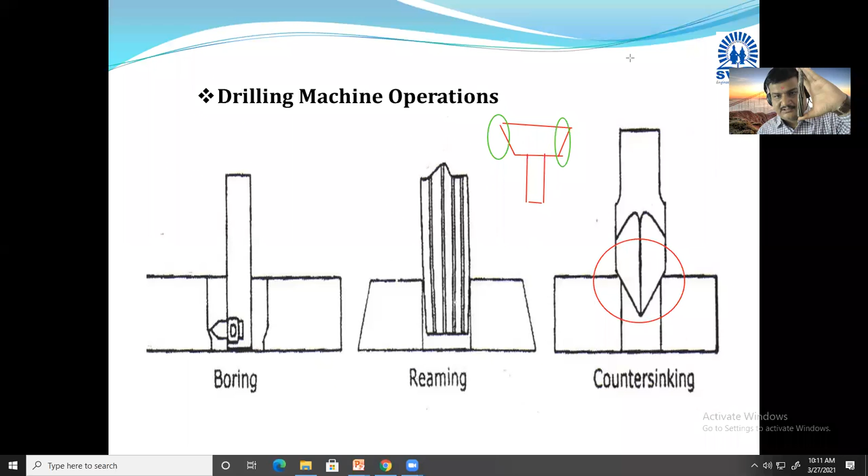This is the sharp, long edges of your reaming tool, which is called a reamer. The reaming tool is also called reamer. I will stop screen sharing for a few seconds so this tool is easily visible to you. This is the tool utilized for the reaming operation. You can see the edges here have more length and they are a little bit sharp. These cutting edges are sharp.

When you insert this reamer inside your hole, it removes the additional material present in the hole. Whatever additional material you see in your generated hole, you can remove it easily with the reaming operation. And when you remove that additional material, your generated hole will be very smoothly finished after reaming. That's why this reaming operation is important.

So we have studied 6 operations. Number 1 is drilling, number 2 is boring, number 3 is counter boring, number 4 is counter sinking, number 5 is reaming, and number 6 is tapping. These 6 operations we can do.

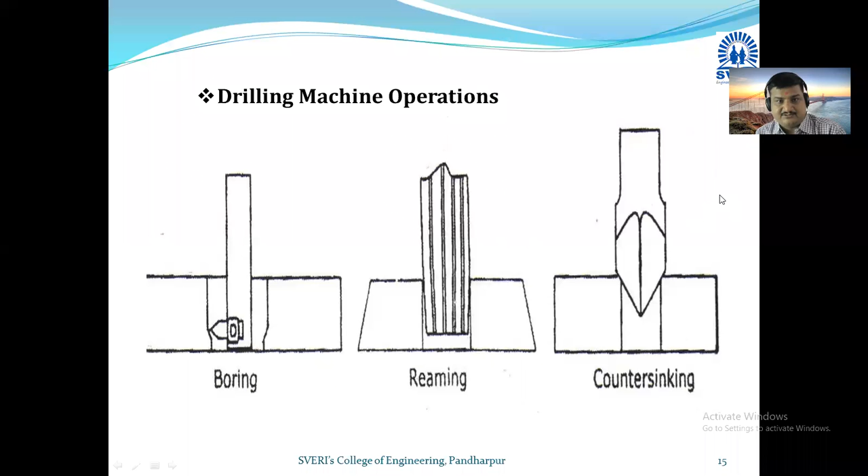Now for your better understanding, I have shown you the counter sunk hole. This is the counter sunk hole. You can see here the conical surface is at its top side, and the cylindrical or rectangular surface in this figure is at its bottom side.

For what purpose is it made? It is made to fix your screw face to face. This screw arrangement needs to be fixed face to face, so we utilize this. Otherwise, what happens - if your counter sink is not there, this part will come above the material surface, as shown in the second figure. And if this comes above the material, it can create harm, and when you handle that particular equipment, such an extended part of the screw can create some injury. So to avoid such things we do this counter sinking.

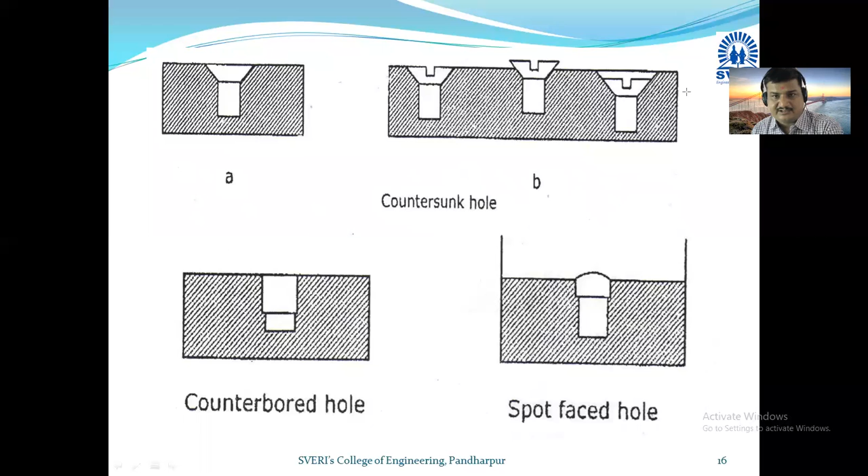Yesterday we saw the structure of the drilling machine, and today we studied the different kinds of operations using our drilling machine. So I request you, without wasting much time, copy down these diagrams in your notebook - very simple, small diagrams, not big half-page diagrams, in 5 to 6 lines. In one line you will draw 3 diagrams, so in half a page the 6 figures of drilling machine operations should be covered. Copy it down in your notebook immediately.

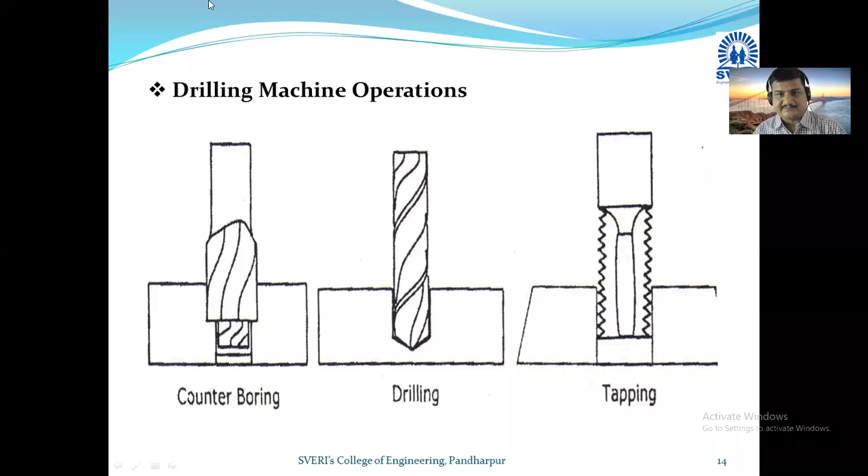Okay, so for the time being, 6 operations we can perform. The first operation is drilling, and you can see on the workpiece you can generate the hole with the help of the drilling operation. It is clearly mentioned that when you want to generate a hole for the first time, you need to go for the drilling operation first, and then you can carry out the remaining operations on that hole. So the basic operation with the help of your drilling machine is drilling.

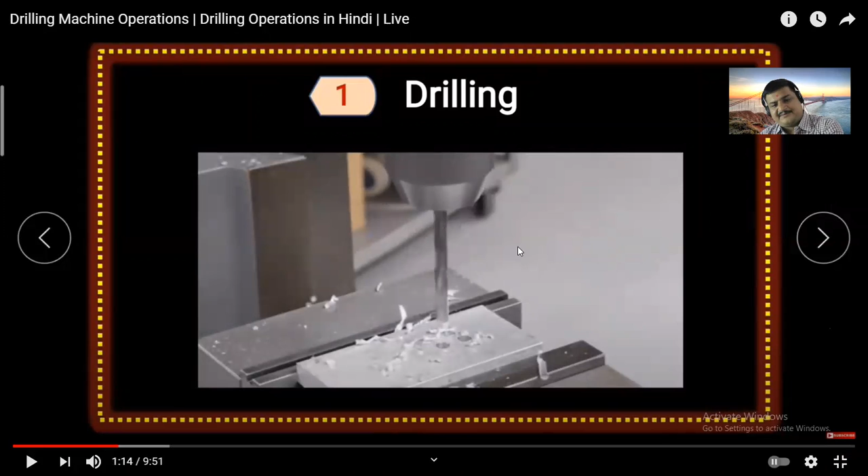You can see the drilling operation, and you can see that the workpiece is fixed here and the tool is rotating, and vice versa. If you take the example of a lathe machine, the workpiece is rotating and the tool is stationary. So that is the basic difference between a drilling machine and your lathe machine.

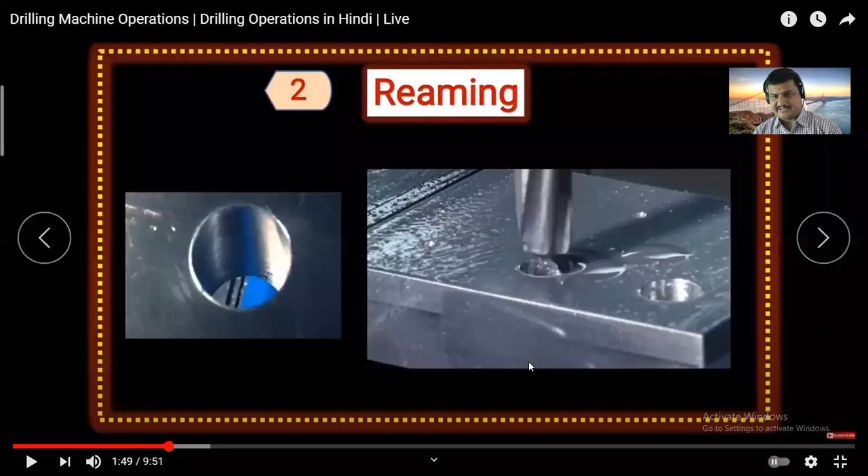Second operation is reaming. You can see the hole is generated. In the picture, on the right hand side one hole is there, then another hole on which that reamer is provided. I have shown you the reaming tool, and here this reaming operation is performed to create a finished hole with a smooth surface. On the left hand side you can see the smooth surfaced hole - look at the surface inside the hole, you'll notice a slight glazing, a shine, because we use the reamer and it makes it very smoothly finished.

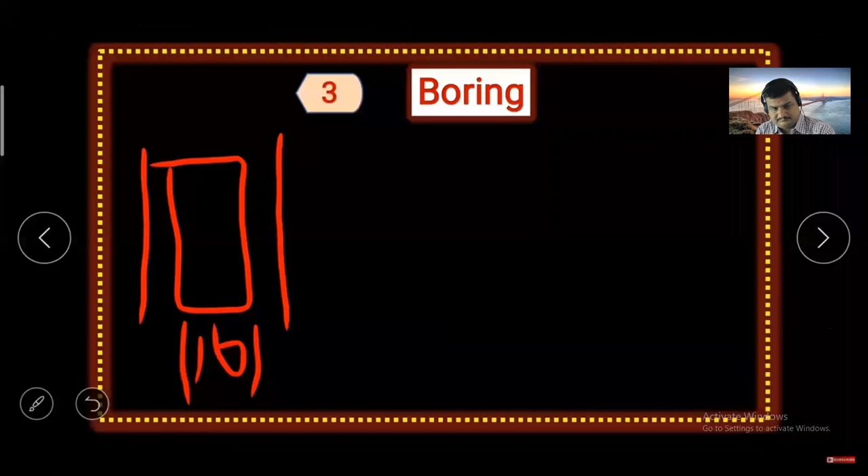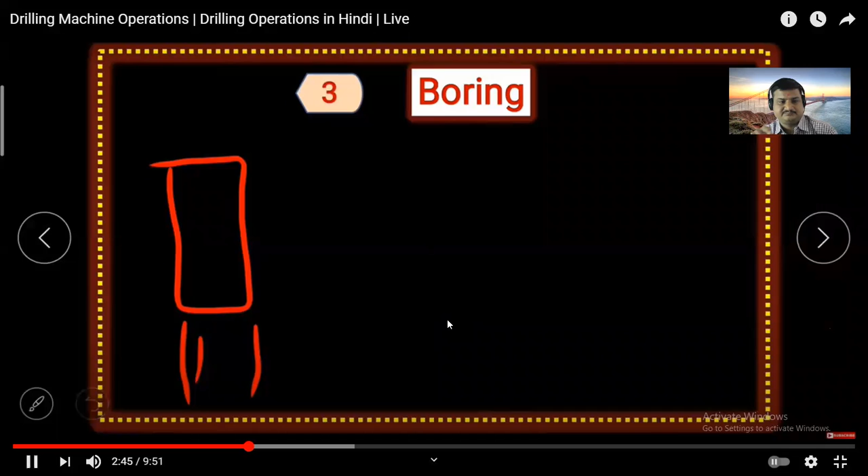So if you have, suppose, one hole of 10 mm diameter, and if you want to convert it into a bigger hole of 20 mm diameter, at that time this boring tool is utilized and the diameter of your hole is enlarged. For that purpose, the boring operation is carried out. See the small hole, and that small hole is being enlarged.

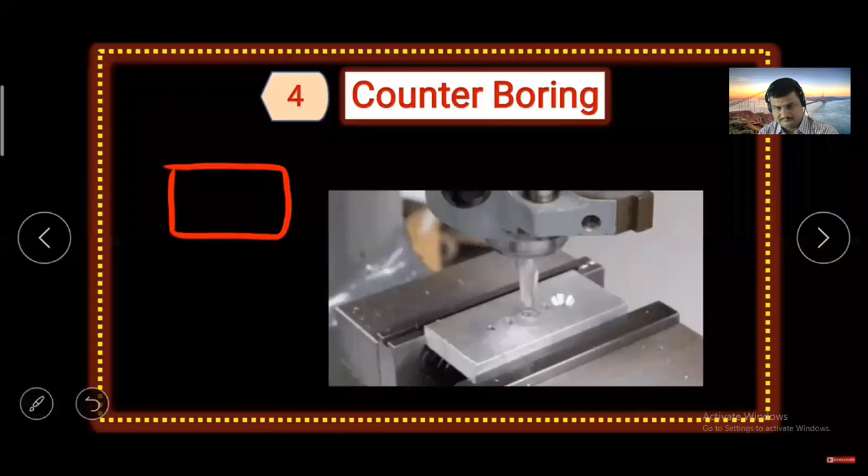So if you have generated a hole and want a top side hole with a large diameter, and a bottom side hole with a smaller diameter, then you can carry out this counter boring in two steps. First, you make a hole of the smaller diameter at the bottom part, and then using the counter boring tool you generate the larger diameter hole on top.

Now you can see in this video, as per this diagram, at the center side there is already a hole, and on that hole we want to perform the counter boring operation, and it has been performed. On its top side we manufacture it in such a way that, with the help of counter boring operation, it has a large size diameter compared to its bottom size.

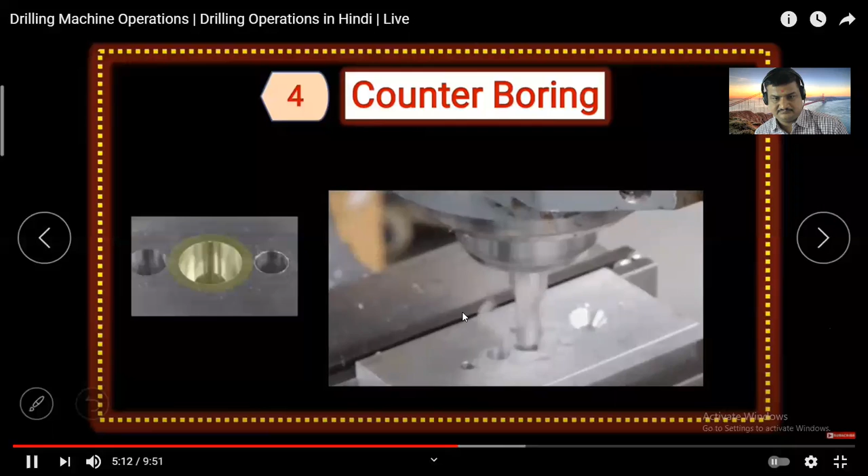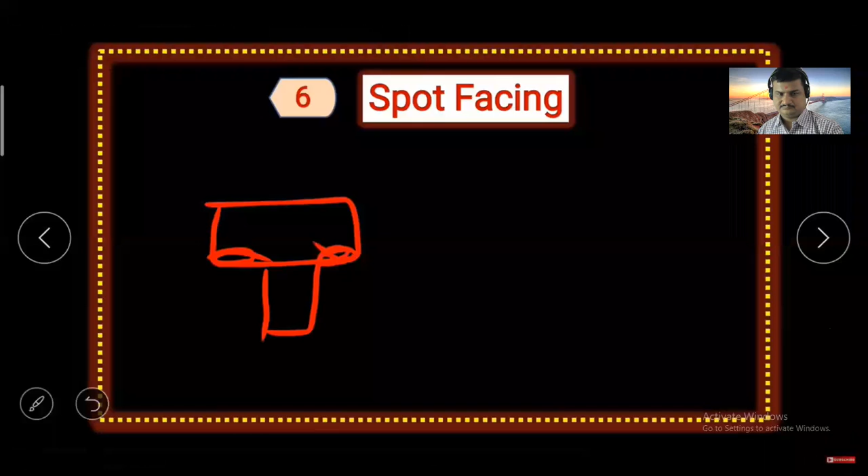So spot facing operation is utilized to once again provide a smooth surface inside the countersunk hole, because at the curved part where there is a proper corner, sometimes material remains there, or the metal burr stays in one place. To remove that and to finish that part smoothly too, this spot facing operation is utilized.

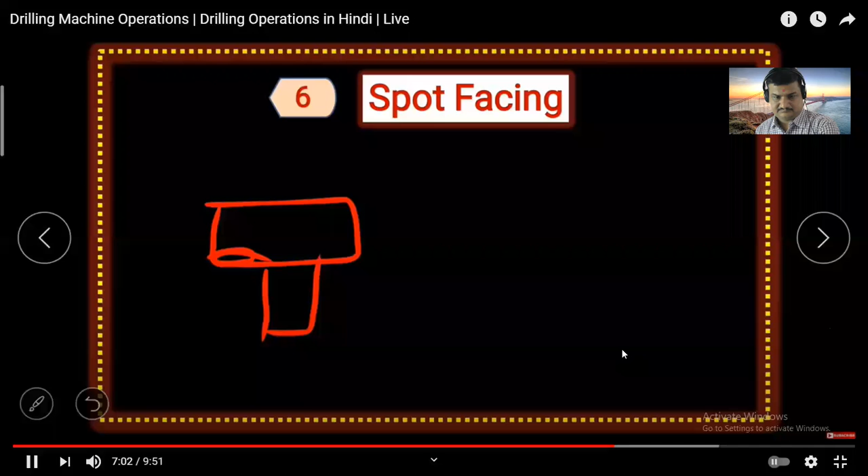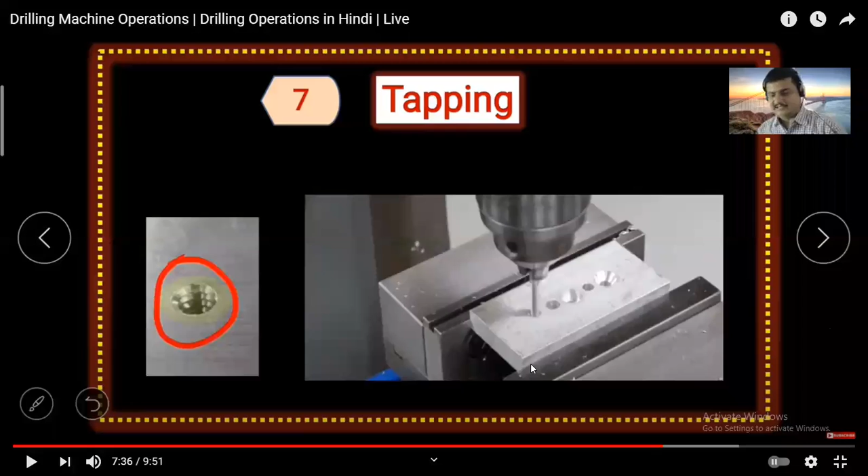So this is tapping. See the figure on the left hand side on your screen - inside the hole of that left hand side figure you can notice threading, and that internal threading is nothing but the tapping operation.

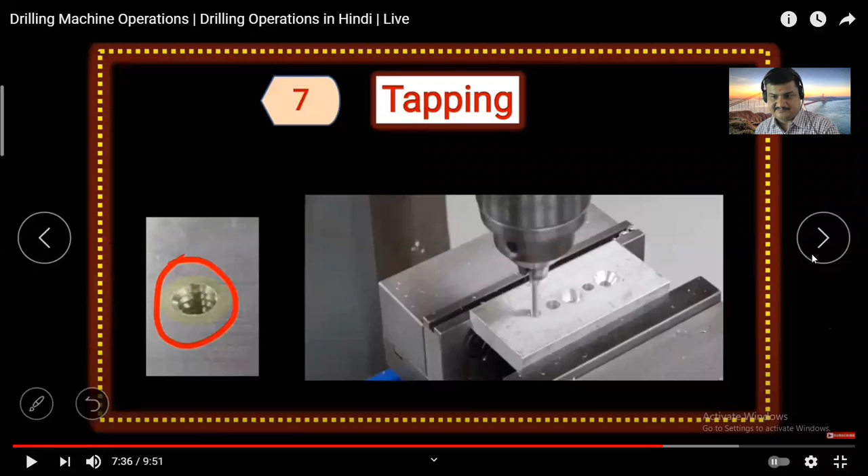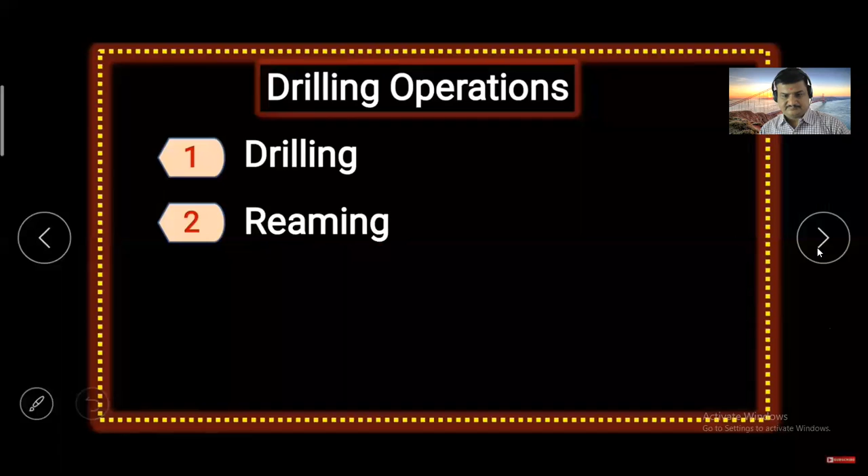So in this way we have seen the various operations with the help of the drilling machine - that is nothing but drilling, reaming, boring, counter boring, counter sinking, then tapping, spot facing. Such kinds of various operations we can perform with the help of our drilling machine. So this is all about the drilling machine.

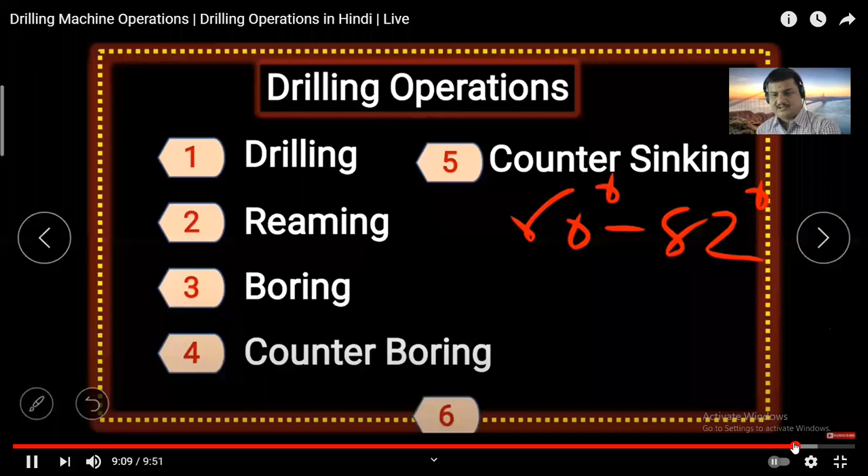So friends, in this particular chapter, the first part was machine tools, and in machine tools we will have to learn construction, working, and its application, or the operations which we can carry out with the help of those machines. So the first part, the lathe machine, and second part, the pillar type drilling machine, we have covered here. From next lecture onwards we will concentrate on joining processes.